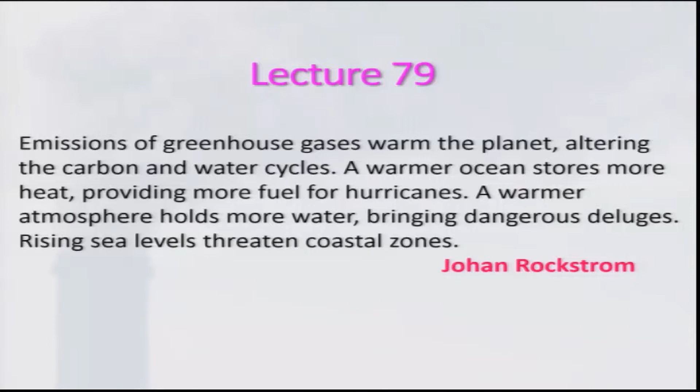Let us start this lecture with a thought process from Johan Rockström. He says emissions of greenhouse gases warm the planet, altering the carbon and water cycles. A warmer ocean stores more heat, providing more fuel for hurricanes. A warmer atmosphere holds more water, bringing dangerous deluge. Rising sea level threatens the coastal zones, and some of these things we are experiencing nowadays.

Let us recall what we learned in the last lecture. We discussed how to take care of expressing the emission level at different oxygen levels as per the standard, even though you are measuring at different oxygen levels. Besides this, you can also express the emission level in terms of emission index, which is independent of oxygen level. Today, we will be looking at how to control the emission from the combustion system.

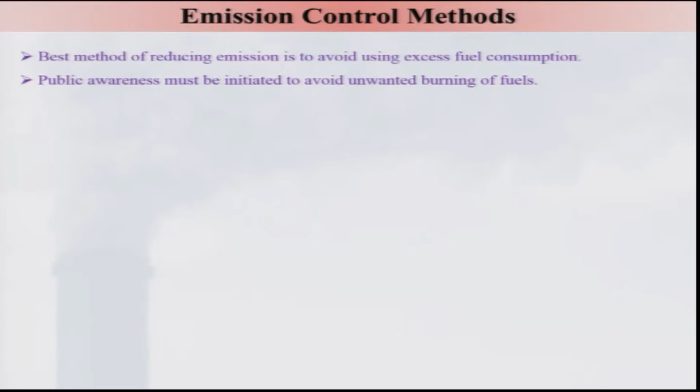The best way of reducing emission is to avoid excess fuel consumption, and there is no other way out. To do that, you will have to create public awareness such that people will not burn fuels in an unnecessary manner, the way people do for their own enjoyment and self-aggrandizement.

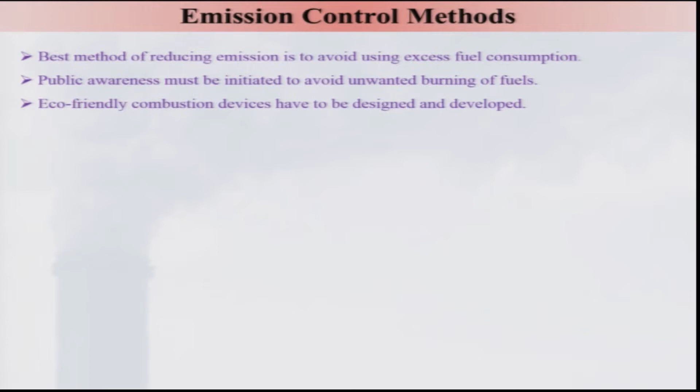Eco-friendly combustion systems should be designed and developed such that they emit less emission. That is where the fundamentals of combustion play a very important role. Besides this, cost-effective methods have to be devised to treat the combustion products before allowing them into the atmosphere. This way we can really help in reducing pollution of the atmosphere to a larger extent.

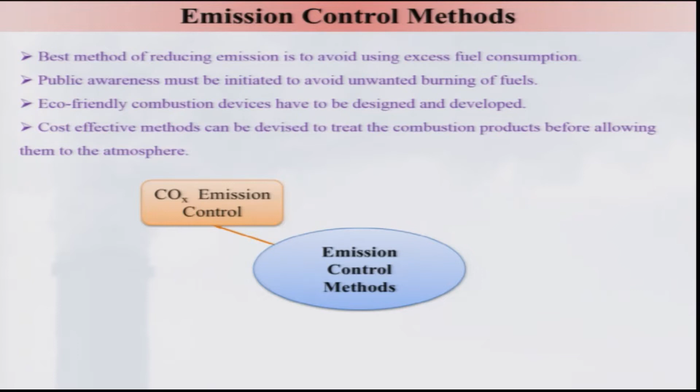When you talk about emission control methods, we are basically talking about COx emission control and particulate control, and also NOx emission control and SOx emission control. So these are the four limbs of emission control as far as the combustion system is concerned.

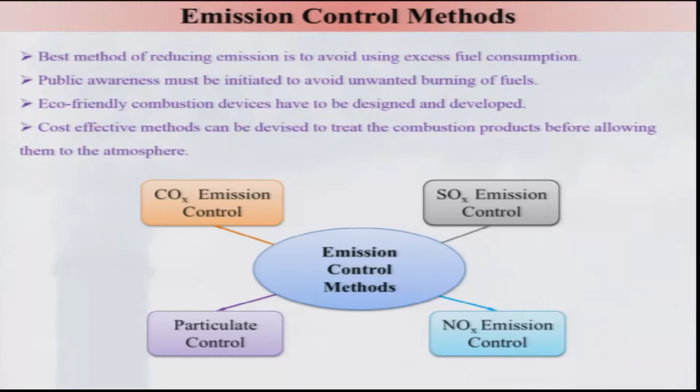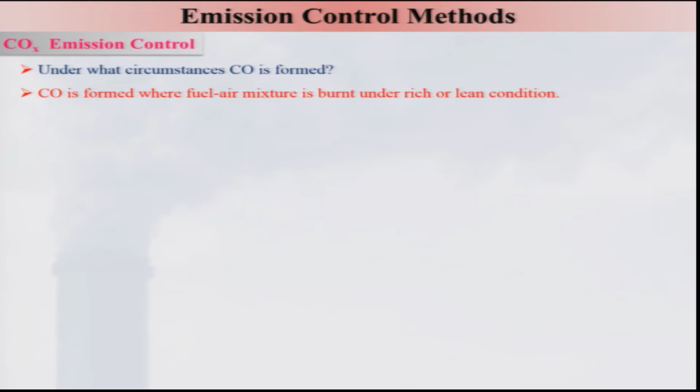For CO emission control, a question arises: under what circumstances is carbon monoxide, CO, formed? CO is formed where the fuel-air mixture is burnt either under rich or lean conditions. If it is a rich condition, one can expect CO, but under lean conditions, the question arises how it is formed. The CO is formed due to dissociation of carbon dioxide, particularly at high temperature.

The question then arises why CO is formed under fuel-rich conditions. Because of that condition, oxygen will be deficient, and therefore carbon monoxide will be formed along with carbon dioxide, as the carbon monoxide is not really converted into carbon dioxide.

What are the ways to reduce carbon monoxide emission? There are two ways one can think of. One is recirculation of flue gases, such that the carbon monoxide at the exit of the combustion product is again reused so that it is converted into carbon dioxide. Another way is to capture the carbon monoxide from the product gases using membrane technology.

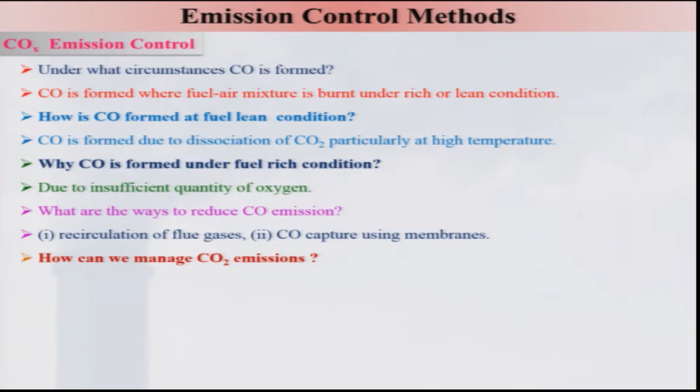How can we manage to control the CO2 emission? By carbon dioxide capture and storage technologies.

What are the options available for carbon dioxide storage? One is, of course, storage in oceans, and the other is storage in geological reservoirs like coal reservoirs, coal mines, oil mines, oil reservoirs, and also gas reservoirs. So those places can be used.

Storage in ocean may not be feasible in recent times, particularly due to the non-availability of appropriate technology. However, the geological reservoirs are a promising option for carbon dioxide storage.

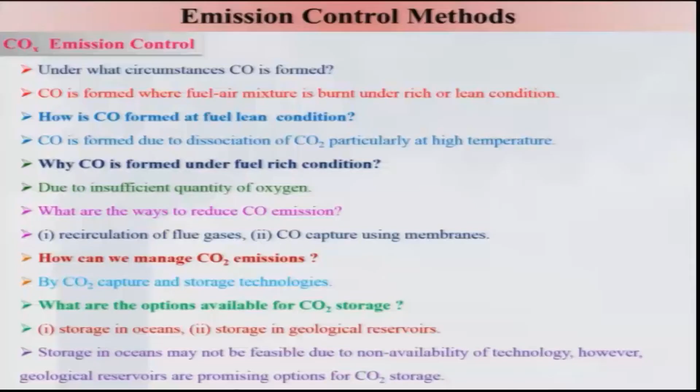This is because the technology is available, and also spaces like mines and reservoirs which are already being used are empty, particularly coal and oil reservoirs already being used by people, and those spaces can be used to store the carbon dioxide. But however, there will be a leakage problem, and one has to look at that.

Now let us look at how we can really capture the carbon dioxide. There are several ways, but we are now going to see how to do that particularly in the coal-based power plant.

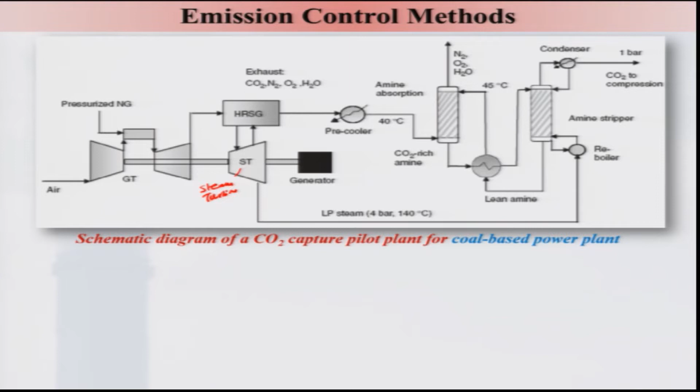This schematic being shown is a combined power cycle. One is the gas turbine on top of the cycle, and there is a steam turbine. In this, what happens is that in the heat recovery steam generator, you get the exhaust gas containing CO2, N2, O2, and water, and this gas has to be pre-cooled to around 40 to 50 degrees Celsius.

One can capture this carbon dioxide basically using monoethanolamine, and this plant has three parts: one is the absorber, basically the amine absorber, another is the regenerator or amine stripper, and there is an exchanger.

As told earlier, the pre-cooled exhaust gas passes through this amine and carbon dioxide is absorbed due to the presence of monoethanolamine, which captures around 90% of the carbon dioxide in the exhaust gas, and this carbon dioxide rich amine passes through.

This chamber goes into the amine stripper, where steam is used at 120 degree Celsius such that the amine is separated out from the carbon dioxide, and it can go back, be heated again, and put into the amine absorber, so that less amount of amine is needed and recycling occurs here.

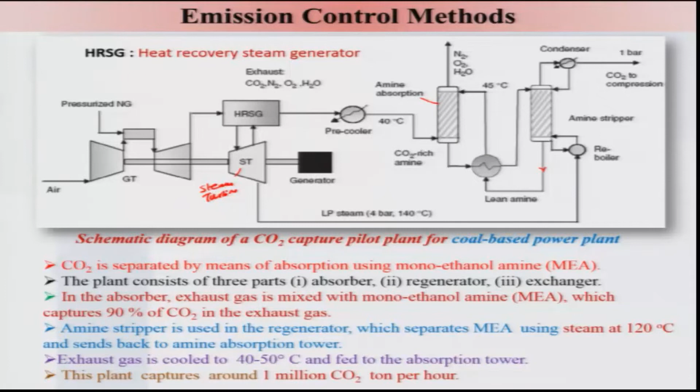And this is, of course, just one of them, but there are several ways of doing similar things, and that has been developed by various companies.

Let us now look at SOx emission and its control. Sulfur is relatively inert and harmless to human beings. However, the oxides of sulfur pose serious environmental problems as they are corrosive in nature, and organic fuels such as coal, oil and wood contain certain amounts of sulfur.

Fortunately, Indian coal does not have large amounts of sulfur, but the Chinese coals have large amounts of sulfur, by which we may be affected. Sulfur monoxide is a highly reactive radical, as its lifetime is only a few milliseconds, and under fuel rich conditions...

In addition to sulfur oxide, hydrogen sulphide, carbonyl sulphide, and elemental sulfur are also formed, and this also has to be removed from the gas before it is let out to the atmosphere.

Understanding the mechanism of sulfur oxide formation has not yet evolved to a maturity level. However, we need to look at various ways of controlling sulfur oxides from the combustion system. There are three ways of doing that.

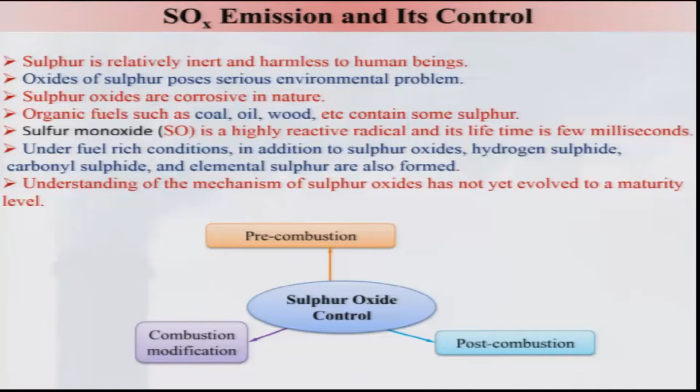One is pre-combustion, another is combustion modification, and the third is post-combustion. These three methods are not only for SOx emission control, but can also be valid for NOx emission control, COx emission control, or any control method as a matter of fact.

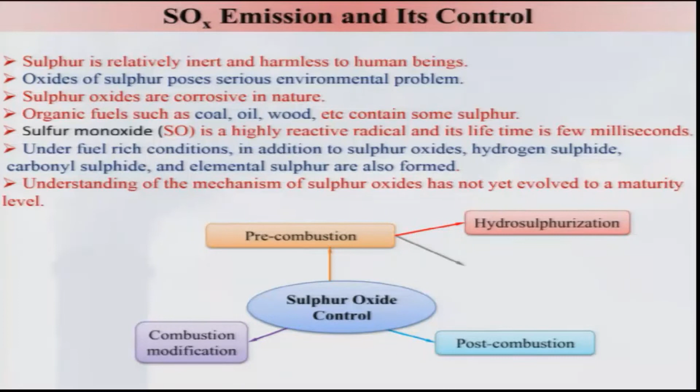So let us look at the pre-combustion method. Hydrosulfurization is one of them, the other is gasification. We will look at both of them briefly.

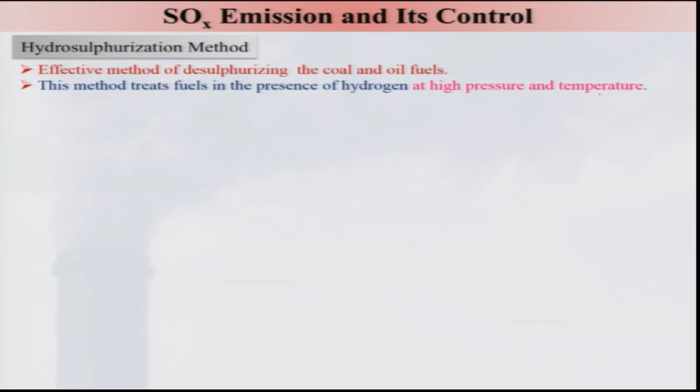This is one of the effective methods of desulfurizing coal and oil fuels, and this method treats fuel in the presence of hydrogen at high pressure and temperature. Now let us look at a schematic of a typical hydrosulfurization method.

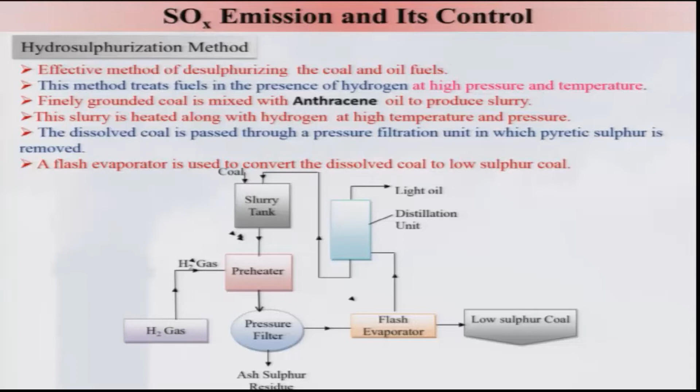So by this one can, as told, the flash evaporator is used to convert the dissolved coal to low sulfur coal. This is a method being used for separating the sulfur from the coal itself before it is used in the power plant.

Another method is the gasification method. Sulfur dioxide emission due to the burning of coal and fuel can be minimized by gasifying them before actually using that gas, and nowadays it is becoming popular because a lot of emission can be reduced, particularly the constituents which cause the emission during combustion.

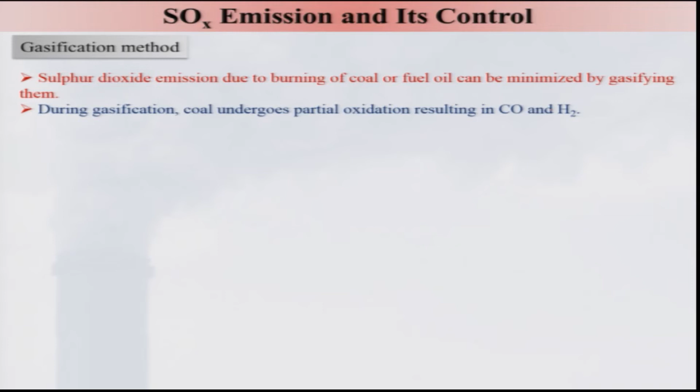So during gasification, coal undergoes partial oxidation resulting in CO and hydrogen, and gaseous fuel is easy to handle, which is why integrated gasification plants are becoming popular and being developed across the globe. Sometimes methane, carbon dioxide and other gases can also be produced during the gasification of coal.

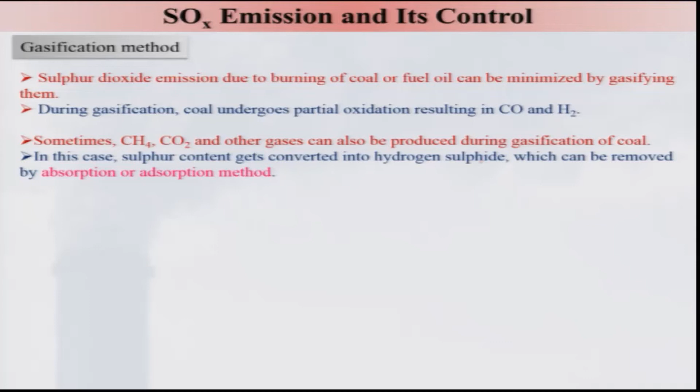In this case, sulfur content gets converted into hydrogen sulfide, which can be removed by adsorption or absorption method. If you look at CH 0.5, this is basically the simplified empirical formula for coal. 4 moles of coal reacting with sulfur gets converted into 4 carbon plus hydrogen sulfide.

In the absorption method, gases are scrubbed with alkaline reagents such as sodium carbonate or ethyl amine, such that hydrogen sulfide and other constituents can be removed easily. Subsequently, elemental sulfur is produced. In the adsorption method, ferric oxide is used to adsorb the hydrogen sulfide using a fluidized bed operated around 400 degrees Celsius.

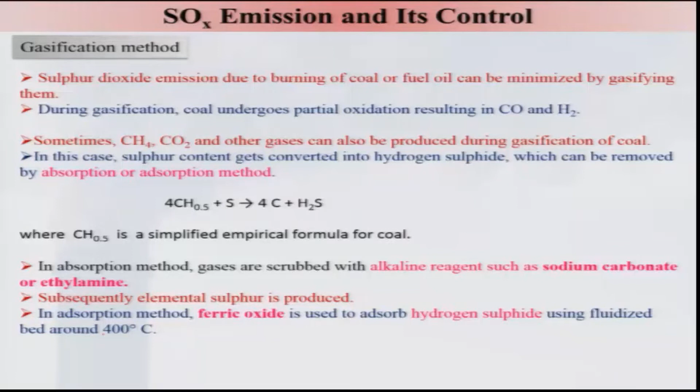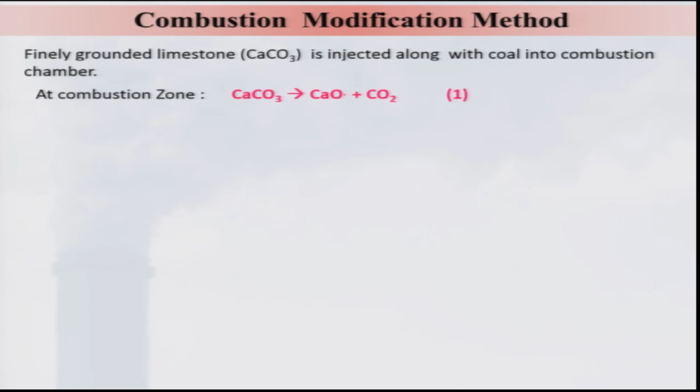So let us now look at the combustion modification method. Generally, finely ground limestone is injected along with coal into the combustion chamber, and at the combustion zone calcium carbonate is decomposed into calcium oxide and carbon dioxide. During combustion, calcium oxide reacts with sulfur dioxide, forming the product calcium sulphite.

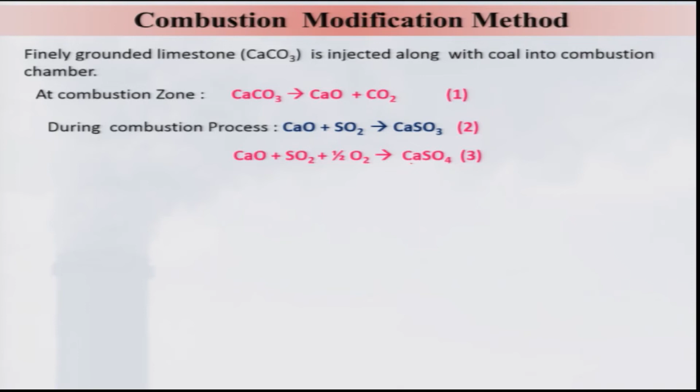Of course, this occurs at a higher temperature, and calcium oxide can also react with sulfur dioxide in the presence of oxygen, forming calcium sulphate. Generally, this reaction is favored at bed temperature around 1000 degrees Celsius, whereas the other reaction is favored at around 1300 degrees Celsius.

However, calcium sulphate becomes unstable beyond 1200 degrees Celsius, and keep in mind that the bed temperature of coal combustion will be around 1500 degrees Celsius. Therefore, nowadays people prefer the fluidized bed combustor, particularly for coal with sulfur, as it can operate at a lower bed temperature, which is effective for removal of sulfur.

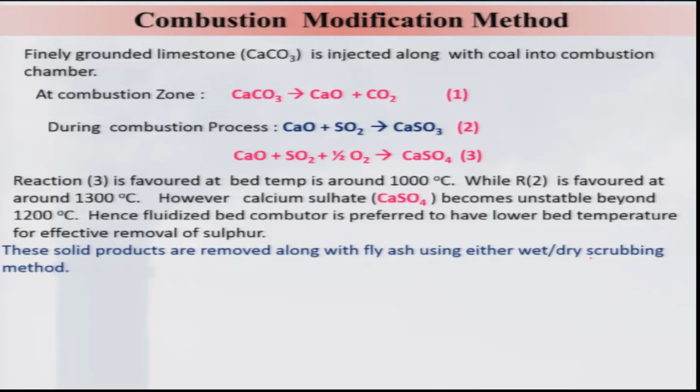These solid products are removed along with fly ash using either wet or dry scrubbing method, which is quite standard. Let us look at the post combustion method. The post combustion methods for removal of sulfur can be divided into two categories: the dry method and the wet method.

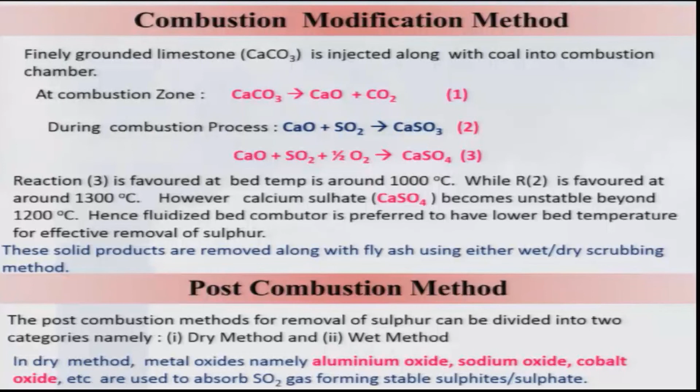In the dry method, metal oxides, namely aluminum oxide, sodium oxide, cobalt oxide etc., are used to absorb the SO2 gas, forming stable sulphite and sulphate, which can be removed easily by wet or dry scrubbing.

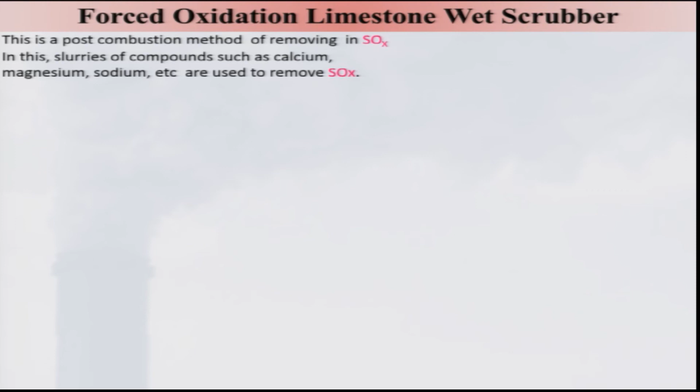Let us look now at the forced oxidation limestone wet scrubbers, which is basically a post combustion method for removing SOx. In this, slurry compounds such as calcium, magnesium, sodium etc. are used to remove SOx. Let us look at a typical setup for the forced oxidation limestone wet scrubbers.

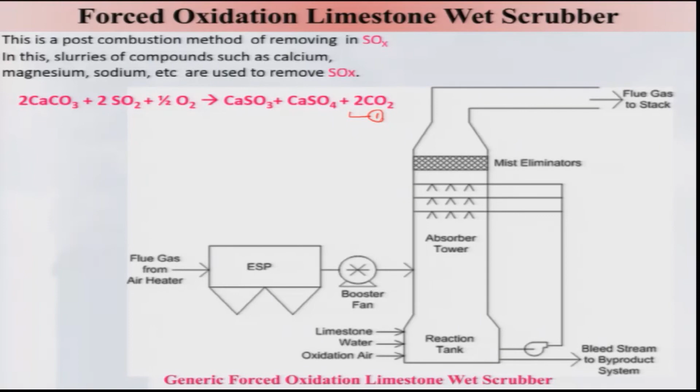Then, once the sulfur is removed in the form of calcium sulphite and calcium sulphate, this gas will be cleaned of SOx, and the flue gas will pass into the atmosphere. This is the method already implemented in power plants, and with this we will stop here, and discuss the NOx removal method in the next lecture. Thank you very much.